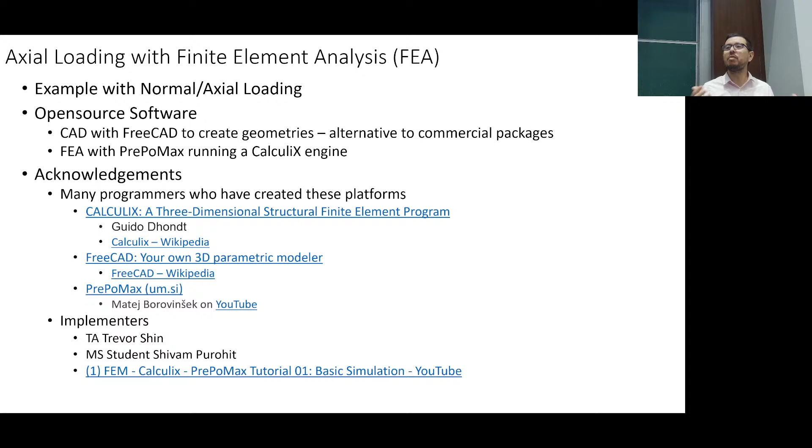You have a variety of packages available for both creating geometries and doing what we could call computer-aided engineering, or finite element, or finite volume, or a whole host of other different types of numerical simulations. When you take multi-physics simulations your junior or senior year, you will use ANSYS, right? So has anyone used ANSYS before? Okay, you were using ANSYS? Great. Has anyone used COMSOL before?

So these are the two big commercial packages available in the realm of multi-physics simulations. If you learn how to use ANSYS, you'll be able to use COMSOL.

I like what Professor Singer has said about these two. I guess we shouldn't have biases, but COMSOL is kind of like the Cadillac, and ANSYS is like a whole bunch of cars that are hard to use or drive. But once you learn ANSYS, if you get an opportunity to use COMSOL, you will. The industry standard has leaned more toward ANSYS, actually. That's feedback we got from our industrial advisory board, so we're going with ANSYS. But academics, we love COMSOL.

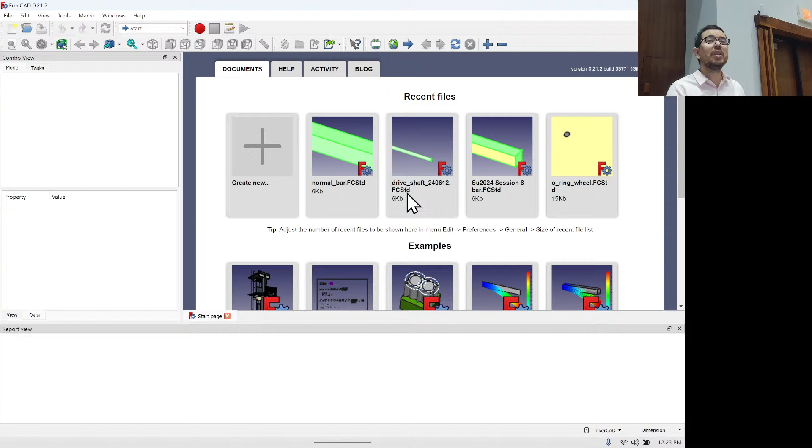Okay, and this will run on a Mac or a PC. At least FreeCAD, I was able to get it to run. We have the Rutgers virtual labs, and I was able to install FreeCAD and run it there. That was fun, that was nice. I had trouble with PrePoMax though. PrePoMax would run on the virtual lab, but it crashed on me. So you might need to find someone else with a PC, or run it in the labs here in EIT or DSV, if you don't have a PC already.

So this will come up, something like this, and we're going to click Create New. One thing that may be a little different, I think it uses maybe this CAD or something. I just have the Tinkercad setting for my mouse, so you might want to have a mouse for this.

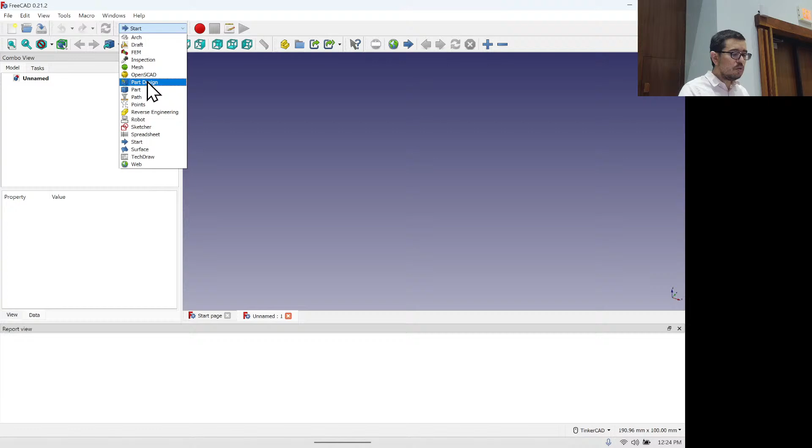We're going to go ahead and get the part coming in. We have these different workbenches, you could call them. You can do Part Design and that would be okay, but for this particular problem, Part is actually probably simpler.

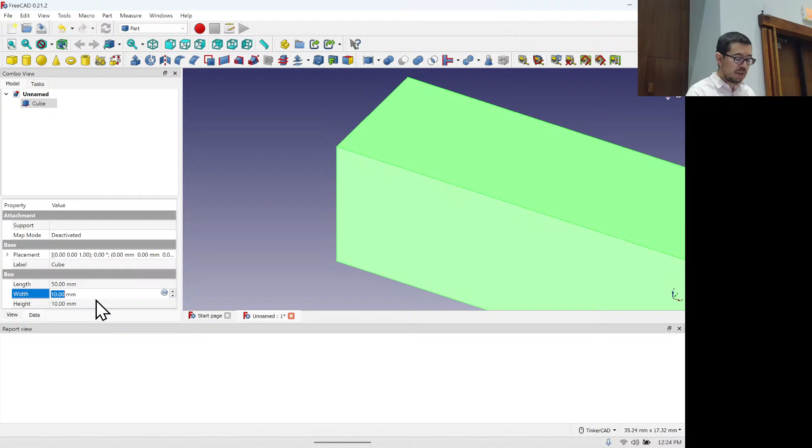We come over here and select a cube, and it brings in a cube. We click on the cube and just give it its dimensions. It's going to be 50 millimeters long, and then 1 centimeter by 1 centimeter, so 10 millimeters by 10 millimeters. So we're done - that's all you have to do in this part, except export.

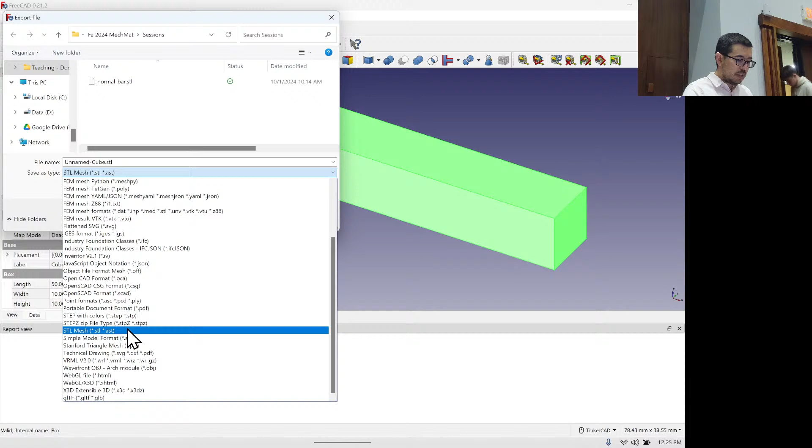So we're going to export this. Yeah, sorry, you had to select that object first. Now we hit export, and we're going to use STL. I think it knows that I like STL - when I installed it this morning, it asked which one I wanted to use. Just use STL, and sure, I'll overwrite what I called normal bar. Yeah, we can replace it. So now we've got this model done.

The next thing we're going to use is something called PrePoMax. So you can just type PrePoMax into Google or DuckDuckGo, and you come here.

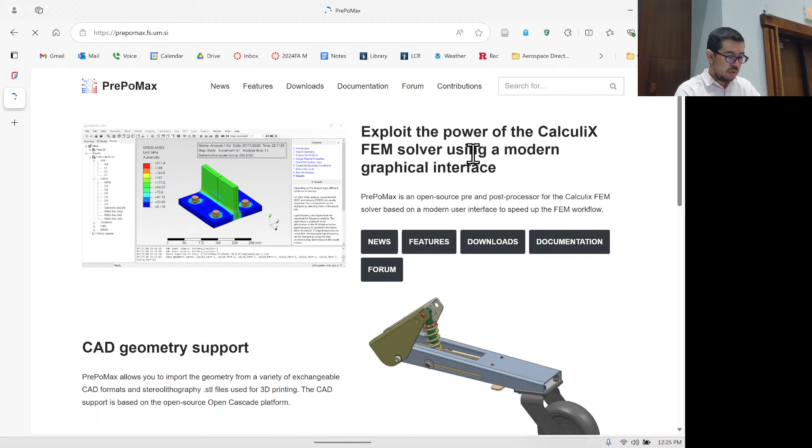We wait, and we can go to downloads. I've used older versions, but this morning I thought, let's live on the edge, so we're trying out their development version. I thought maybe the reason it wasn't working in the Rutgers Virtual Lab was because I was using the development version. So then I went back down to one of the more stable versions, and it also crashed on me. So I don't know exactly what's going on with the virtual lab.

But keep that in mind. So I'll go ahead and try the bleeding edge again and see if I can remember how to do this - the user interface was a little bit different.

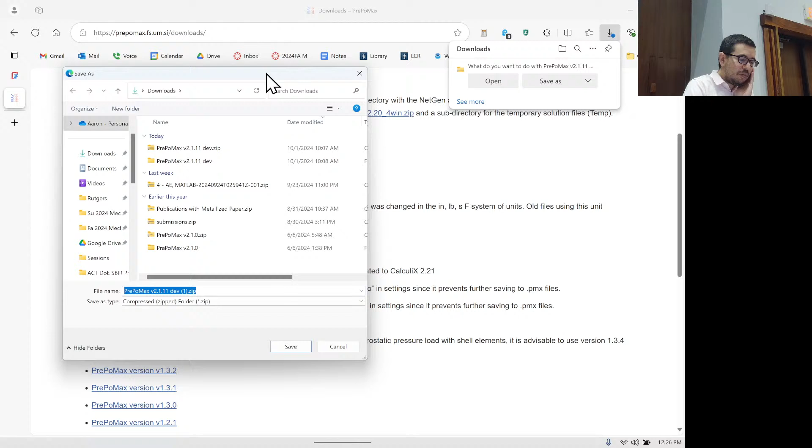What's kind of unique and fun here is that you're going to save, and I understand we live in 2024, so people are not as familiar with file systems - at least that's been my experience working with you younger generation who know how to use things like TikTok and Instagram that I don't know how to use. But back in the day, there was something called DOS, and DOS was all about files and directories. We didn't call them folders, we called them directories.

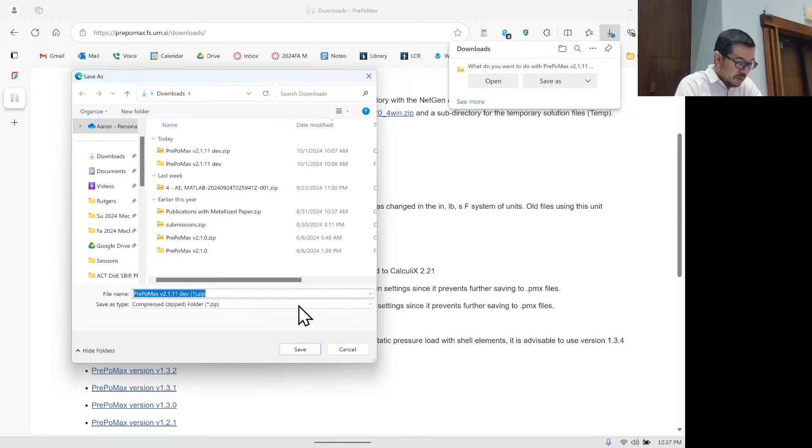Anyway, here I'm just going to download this one to my downloads directory or file folder. It's a little bit large - it's 160 megabytes or so.

Okay, so it's still going. Wow, I must be using a lot of bandwidth in here because this is 2024 and it is boggy. All right.

Well, let's go over and come into the downloads folder. All right, so this is what's downloading, I guess. Okay, now so it's one of these. Okay, I guess this is the one we just downloaded, 1227. So, okay, you right click and then extract all, and we can extract it right there. Okay, and my computer, all right, that should be independent of the internet, but it's of course doing a bunch of processing, and it's not the most powerful machine.

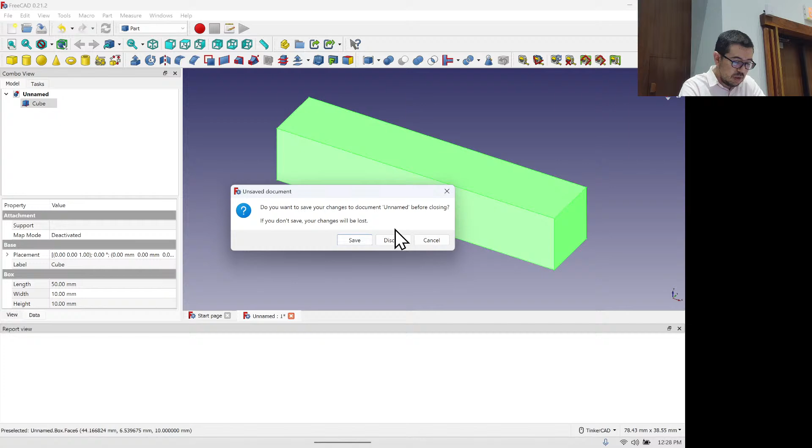Okay, and maybe I'll go ahead and close FreeCAD because I don't need this anymore, so give my computer a little bit of room. I can discard it. I've already saved it as the STL, so I don't need to keep that file.

All right, so now this is a little bit different. This is not your standard... Like the other thing that impressed me recently was I was doing something with the first year students, and they're like, 'Oh, this is an app on a PC.' I'm like, 'App? Who calls this stuff app?' But I guess that's what we call them now. It's a program, all right? It's a piece of software, and we go into it, all right? And this is gonna

upset people, all right? But what you see is we're not installing anything. We're running an executable directly. You see that? We didn't install. We are running the executable. So you just double click on prepomax.exe.

And if this is, okay, I'm just making sure I don't have too many things going. Maybe I do, I probably do. Maybe I didn't double click. Maybe that's my lack of understanding. But we're gonna open this. Okay, I guess I didn't double click. Okay, it's gonna send a scary message. You click more info and we're gonna run anyway. All right.

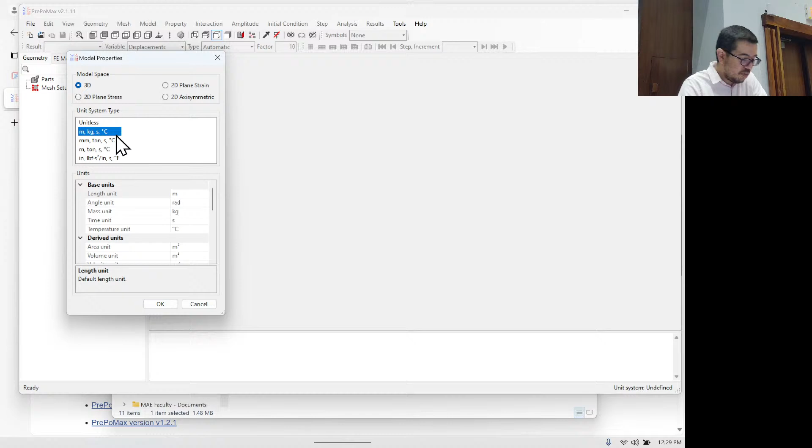Okay, and then it comes up. So once you've got it up, we're going to create a new model. It's going to be a 3D model, and let's just use meters, kilograms, second, and degrees Celsius. Okay, we hit OK. Then we are going to import

our bar, all right, our STL file, and we do that. Now, here's the bar. All right, isn't it beautiful? Does anything strike you as odd about this? Are there any issues? Just look at the image.

Yes. Okay, it's not connected to a wall. Okay, yeah, okay, it's not connected to a wall. That's a good point. All right, it's in space. Anything though, be a little bit observant.

Yes, Mark. The length. What did we say the length was? We said it was 5 centimeters. Look at the scale bar under there. 36 meters. Okay? And in fact, if I bring it down a little bit,

if I can, maybe I can't because I'm not as... Oh, there we go. All right. See, like I can zoom in a little bit, or I can zoom out a little bit. What does it look like its length actually is? 50 meters, right? That's not what we want to solve.

So this is a common problem whenever you deal with STL files and you go from one piece of software to another piece of software, okay? If you do it with SolidWorks, you're going to probably have similar issues. I don't know what the scaling factor is, okay?

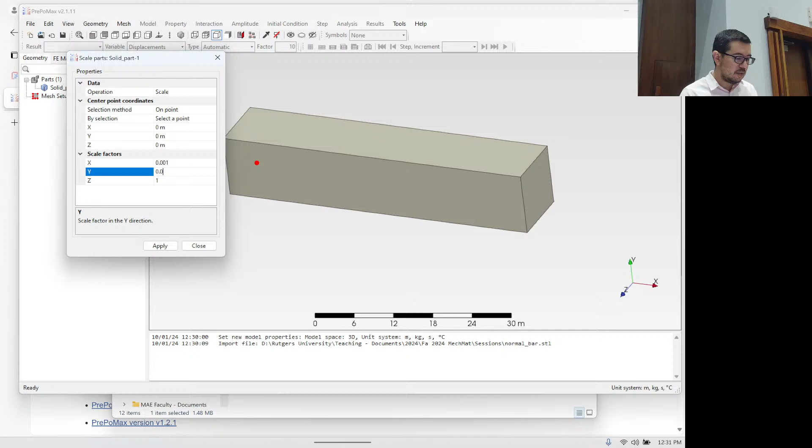So what we do is we come over here to geometry, we go to the part, and we go to transform, and we go to scale. And we're going to scale this by 1/1000 in all 3 dimensions, okay? And we hit apply, and poof, it's gone, all right? Don't hit apply again. It's like, you know, we can just keep shrinking it, all right?

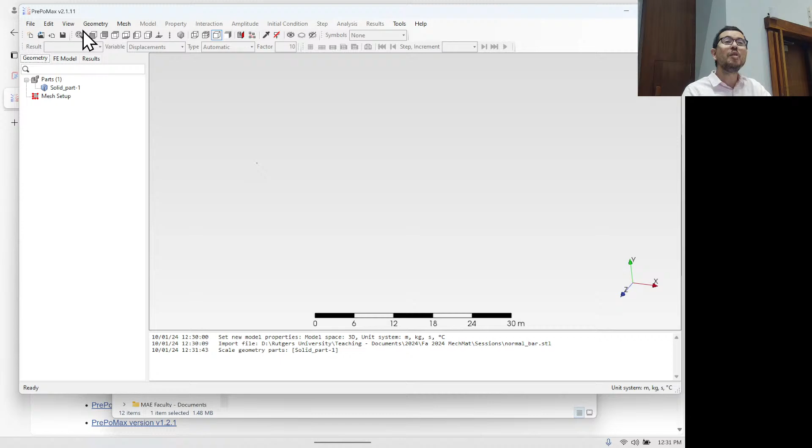Okay, so we close that, and of course, this software, well, maybe not of course, the software is awesome for what it is, but nowhere close to a commercial product. All right, so you click on this thing that says zoom to fit, and voila. All right, now we've got it, and it looks like it's about right.

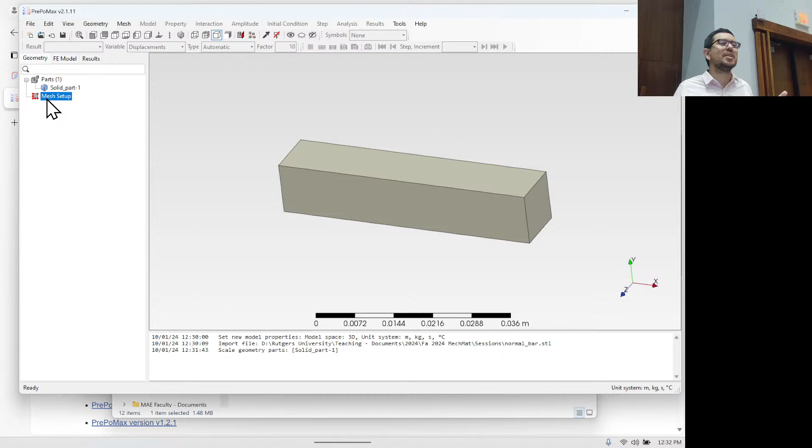Okay, so now we can come over here, and this is an object. It's like the table. What does finite element really mean? It means that this, you know, theoretically has an infinite number of material elements, right, of infinitely small size. Finite element means we are going to discretize this object into a finite number of elements that are interacting with each other, and we're going to see what the result is.

So we come over here, and we're going to use the mesh. We're going to create a mesh, and we're going to click on mesh parameters. We're going to click on part. We're going to click on this, and that's where it crashed. So if it crashes for you, I don't know what to do. All right, find another computer, maybe change your settings.

I couldn't run as an administrator on the Rutgers Virtual Lab, so that might have caused an issue. Try finding a compatibility mode, I don't know what to tell you. That's where it crashed.

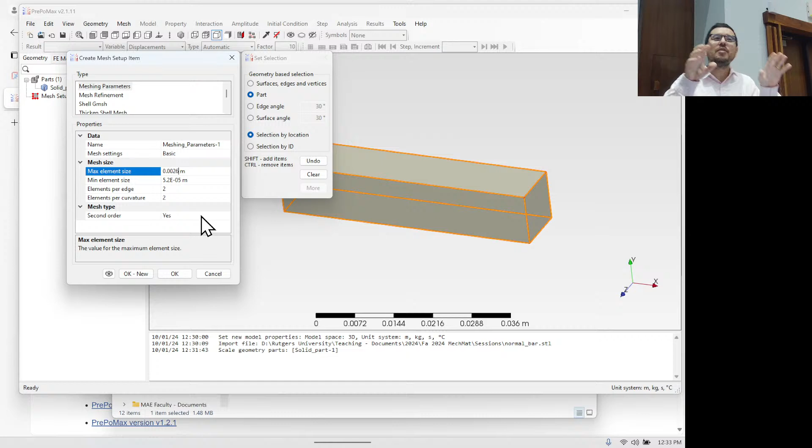Here you get to play with this number a little bit. This is asking what's the minimum element size and what's the maximum element size, and you'll get a feel for this as you do more simulations. You could have a finite element model where it's just like 3 blocks inside, but given our computational power, that's not the most effective number of elements to get the behavior we want. So you can play with this.

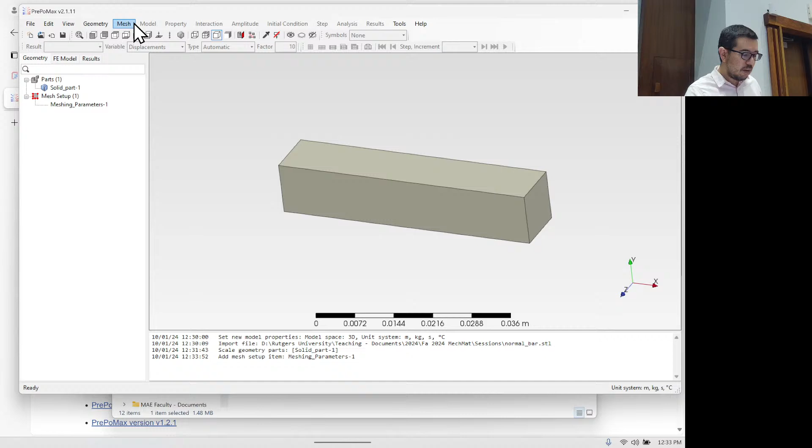If I put it down to 1.5 millimeters for the maximum element size, in this case, I hit OK, and then I do create - whoops, these are just the parameters. Now I go to mesh, and I create the mesh, and it takes a second.

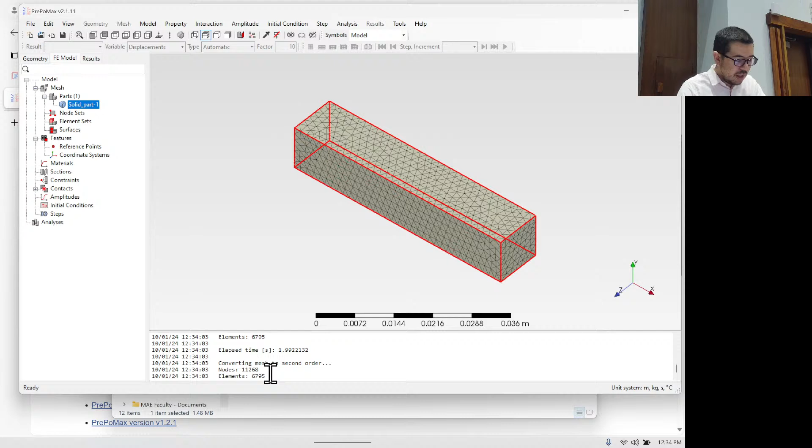That doesn't look bad. You see these - we can only see what's really on the surfaces in this case, but it looks like you've got a lot of elements, right? It tells us there are 6,795 elements and 11,268 nodes, because even though it's not showing all of them, it has discretized the entire volume.

So what do we do now? There's a tree here, and we can attack this in different ways. Maybe I'll go from top to bottom, but it won't necessarily be clear why we're doing things. What we're going to do is create a surface on this side.

This surface is going to be where we apply the axial force. That axial force is going to be distributed over that entire surface, and that's what's going to be pulling the bar axially. So we'll go ahead and create a surface, do selection, and do right like this. Boom, surface 1 created.

We're also going to create a reference point. This reference point is where we're going to apply the load. So we're going to create it, and the easiest thing to do here is actually specify the coordinate.

This was 5 centimeters long, and you see we have a coordinate system x, y, z, so it's in the x direction. So we're going to say 0.05. Okay, and look, it moved it to a corner, right? That's because y is 0 and z is 0. So at least PrePoMax and FreeCAD are communicating about where the origin is. Sometimes when you use other pieces of software, they don't even agree on what the origin is, and that makes things kind of messy.

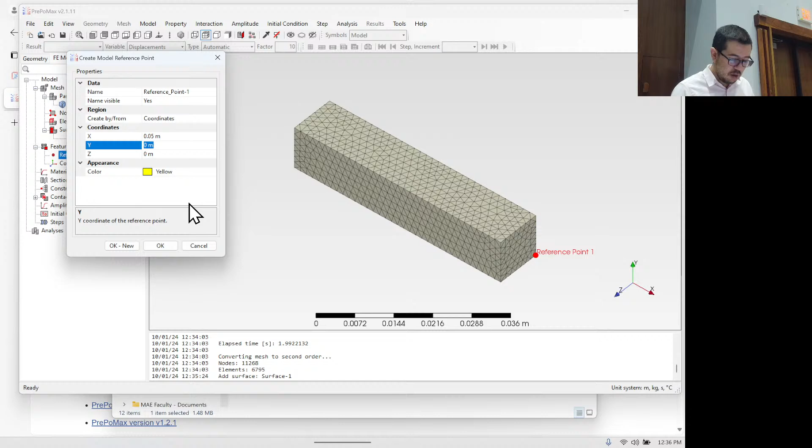So we're going to move it up to the middle, up to here. So we're going to go up 2.5 - oops, yeah, I think that's right. No, oh no, it's not 2.5 millimeters. It's a 1 centimeter by 1 centimeter, so it's 5 millimeters. That will get us to the center. You see that? So that's where the reference point is, and we hit OK. That's where the force will be applied.

Coming down to materials, let's go ahead and create a material that has elastic properties. So we can grab here and drag over - oh, no, maybe not, maybe I better use this. Okay, use that.

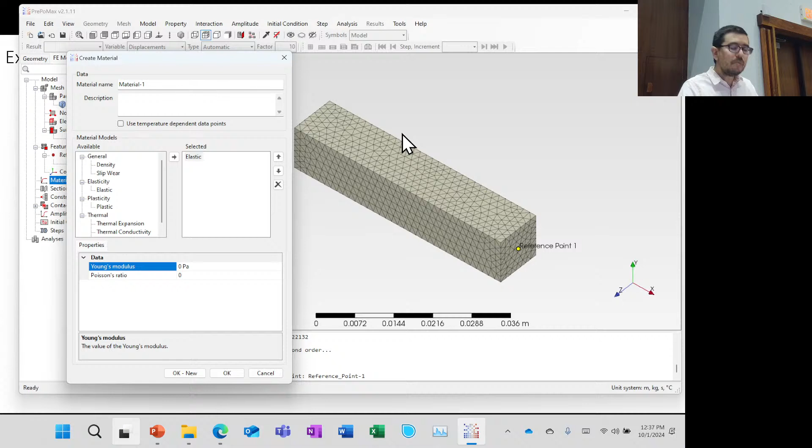And the elastic modulus we were given in this problem - whoops, not there, where are you? Okay, elastic modulus is 200 gigapascals, and the Poisson's ratio is 0.3. So what material is it probably? Steel, probably steel. So we can do 200 GPa, and we can do 0.3, just like that, and that's what we want there.

Sections - we need to create a section. We're going to create a solid section for the entire part. So we just click on it, boom, and it's done.

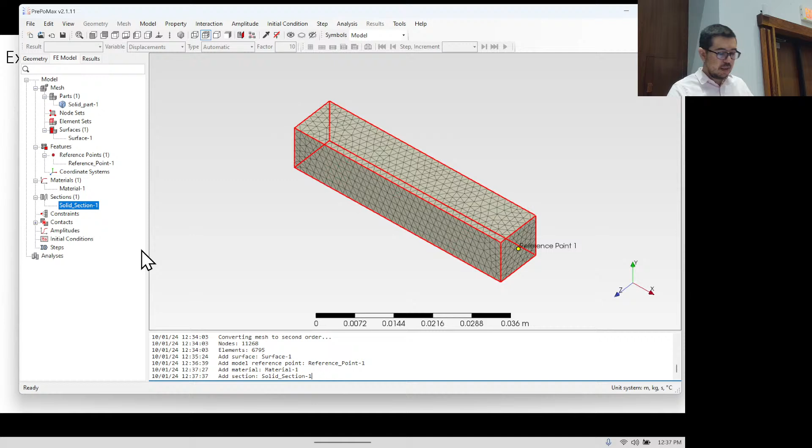So that's a section. In terms of a constraint, we're going to create a rigid body. This is going to link - you see that's reference point 1 to a surface. And what's our surface? Surface 1, that's the only one we created. So they're linked, that means that when I apply the force to that point, it has this surface that's a rigid object. What does rigid mean?

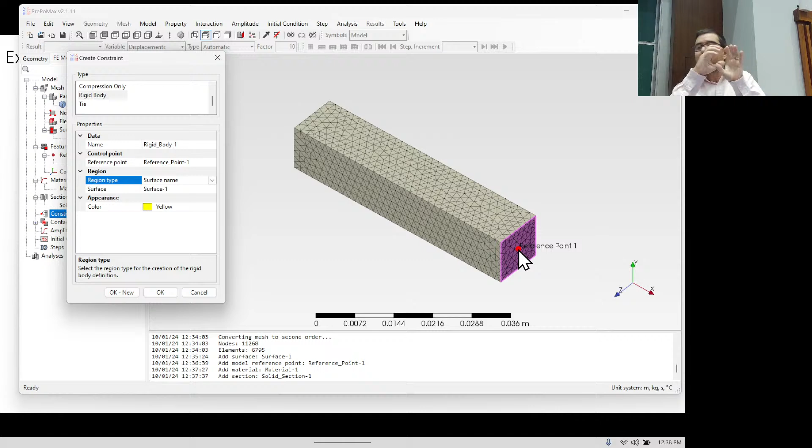It means that it's not going to bend. So when I apply it at that point, it's now distributing that force over that entire rigid surface that does not bend, but is attached to the rest of the body. So that's a nice way to connect them and be able to get a contact force distributing over a larger area. I don't think we need, we're not going to use any contacts here, all right?

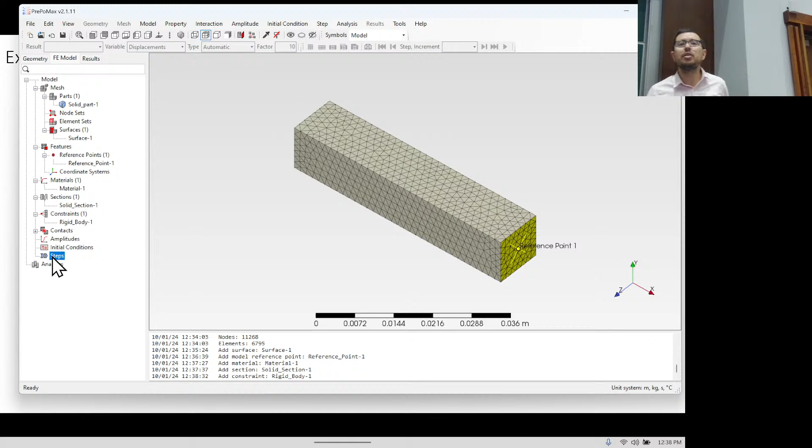And we need to add physics, all right? So in other packages, they'll be like, physics, what kind of physics do you want to use? In this software, it's called steps, so these are the analytical steps. We're going to create, and add a static step. We're just doing statics, right? That's what this class is about. We will actually, if we have time, I'll show you how to do some thermal stuff too. But we hit OK there.

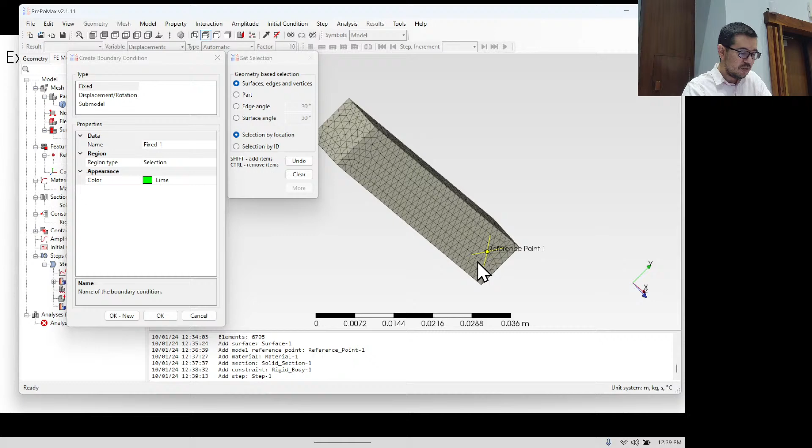Okay, now, finally, who was it? There was no wall. Who said there's no wall? All right, we got to add a wall. So we come over here to boundary conditions, we're going to create a fixed wall, just like that. We hit OK. That doesn't necessarily look like a wall, but it is a wall, okay?

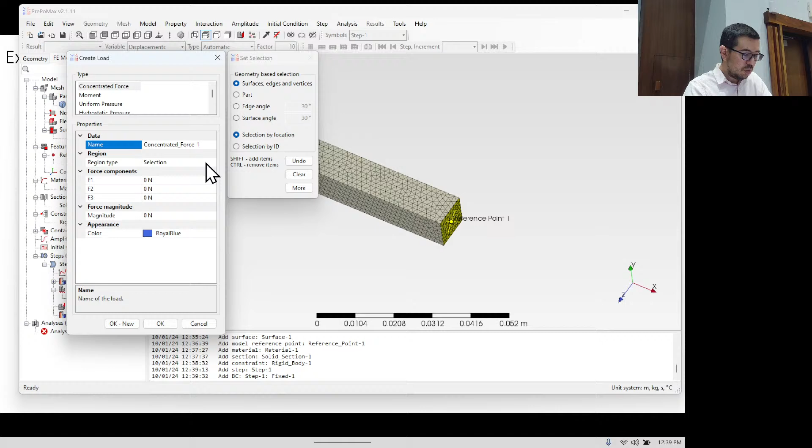And we need to add a normal force. So we come over here to load, and we're going to create a concentrated force, and we're going to use it at the reference point, okay, just like that. And here you're going to see F1, F2, F3. In PrePoMax and other softwares, sometimes instead of saying X, Y, Z all the time, they do 1, 2, 3. So obviously 1 goes with X, 2 goes with Y, 3 goes with Z.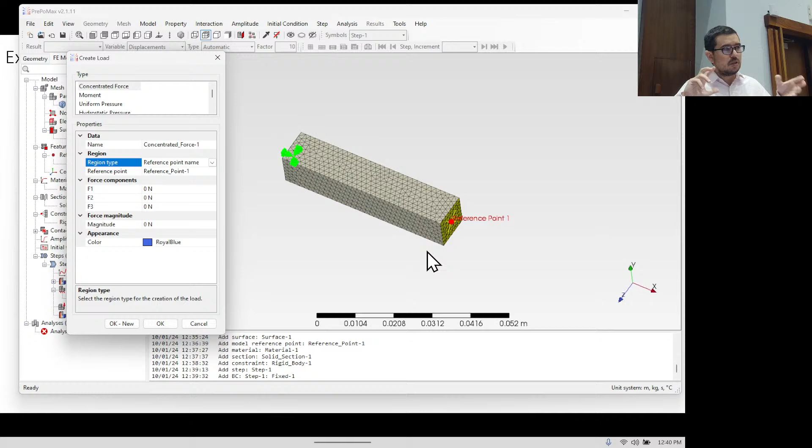At least usually. I've had issues with the coordinate systems in PrePoMax in the past. I hope at least for this problem it's not going to be an issue, or at least for today we shouldn't have any issues. But when we start doing things with shear and shafts and beams, I have had some issues with it. I don't know, we'll see once we get there if those things have been resolved.

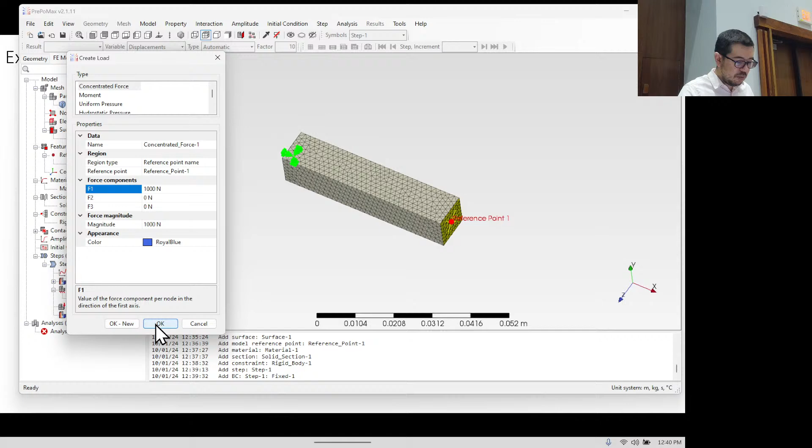Okay, so we're going to apply a force of 1,000 newtons. That was what the problem said, in the x direction. It's got a magnitude here, and we hit OK, and wow, all right, great, it's coming out. 1,000 Newton force right there.

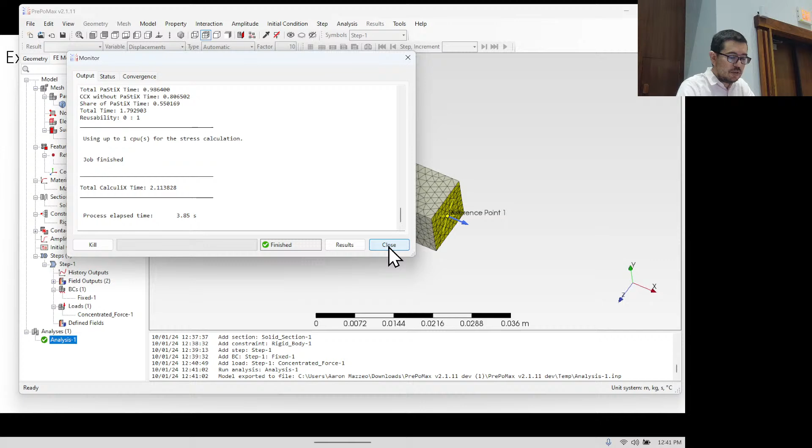Okay, and if I have not made any mistakes, I think we're ready to go. So we're going to go ahead and run the analysis. It takes a little bit of time, but it's actually probably faster than you or I could do that analysis. Well, definitely faster than the finite element. But whether this is more, how do you say it, more efficient than doing the hand calculations, that is debatable. All right, so now, oh, what happened?

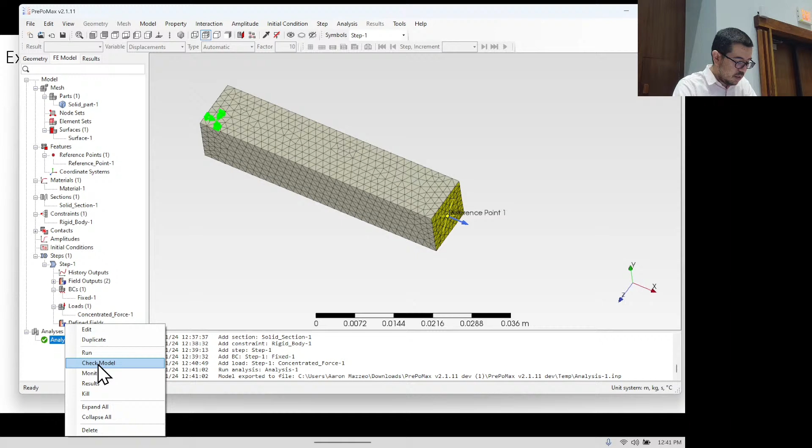Oh, I think I need it. Let me just run it again, or maybe results. Yeah, if I click on results, there it goes. Okay, so here are the results.

All right, so what are we looking at here? What in the world are we looking at? Okay, this tells you over here. So this is where color is nice, it tells you what it's showing in its colors. So this is DISP. What do you think DISP stands for? Displacement, right? It doesn't stand for 4K display or something like that, right? It's your displacement. And it even tells you what the units are, right? That's meters. So this is going to be giving you the displacement in all three directions.

Okay? Now, what if, and it says, because this is all, right? What if I only want displacement in the x direction, right? And that's kind of where we typically are for this class. I can select that, so that would be U1 here. That's displacement 1, and it's in meters. And this node right here is telling us where the maximum is.

Theoretically, this is at the same spot as that, right? Or it's, when we were talking about averages, right? Theoretically, this spot is at the same spot as all of these, right? But this is a numerical solution, okay? And it has a lot of decimal points at the end. So it's going to show us things that are just nonsensical in a sense, right? Like the fact, for example, here that the max is at this node. Is it really any different than, say, here or here or here or here? For our practical purposes, probably not, okay?

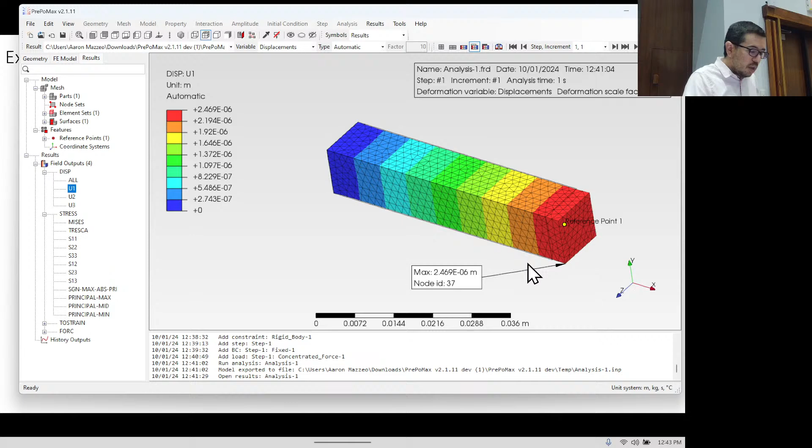The other thing you can do is right-click here and do a query. Let's select right in the middle, because I'm more comfortable trusting that. Now it tells me it's exactly the same number, at least to three decimal places or 4 significant figures. That's the result I've got. I'll hit close, and now that's there.

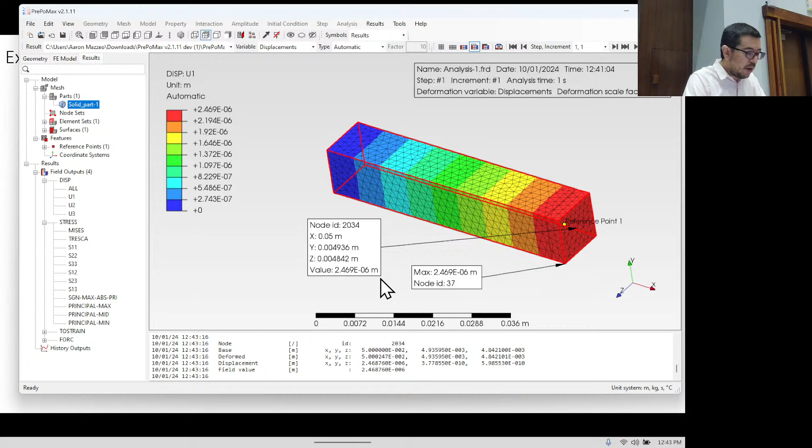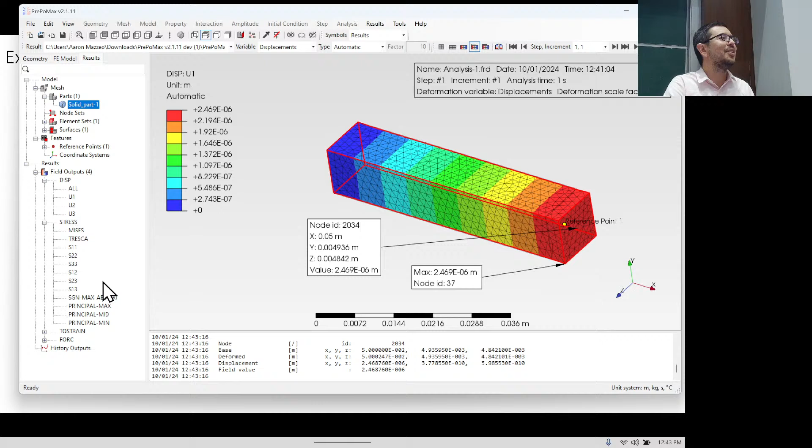What if we want to know stress? Which of these stresses, you see this is called stress. Which of these do you think is of most interest to us? Anyone? Okay, S12. Why do you say S12?

Well, I have no problem clicking on it. Okay, S12, this is interesting. There is a value there. You can see that there are some stresses. S12 means we're interested in the x face in the 2 direction. Think of those as subscripts. S is sigma 1, 2, so that'd be like sigma xy.

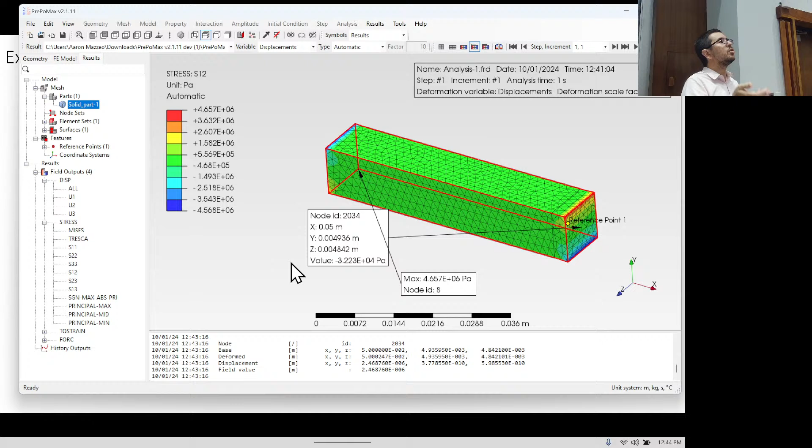We know we don't really write sigma xy, we write tau. So that'd be like a tau, that's a shear stress. In this case, we're not so interested in the shear stress. It does exist, that's fine. If we look at it, it's down at like 10 to the 4th pascals, at least in our area.

And I can put another query over here on the side. But look at this, at this location it's only 13 pascals. So interesting stuff is happening at the edges. Notice that. Why is that happening?

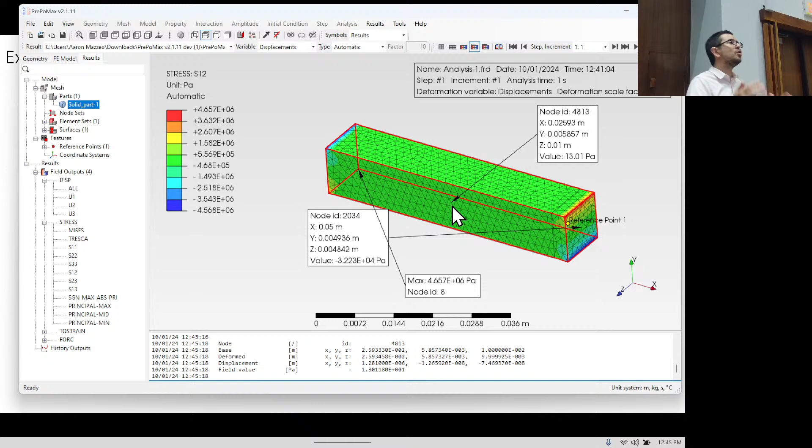Why do you think there's... this is kind of like saying, okay, I thought the stress would be low, the shear stress would be low, because this is not a shear stress problem, this is a normal axially loaded one. But why do you think there are significant shear stresses? It even says 10 to the 6. Why are there shear stresses at these boundaries?

Just think about what shear stress is. Okay, so like you're thinking, alright, if this is sigma 1 2, if it's tau 1 2, it's tau xy. Which direction is the x direction? Well, the x is on, so this would be acting on this face, that's on that face, and then it's acting vertically. That's the direction of the force.

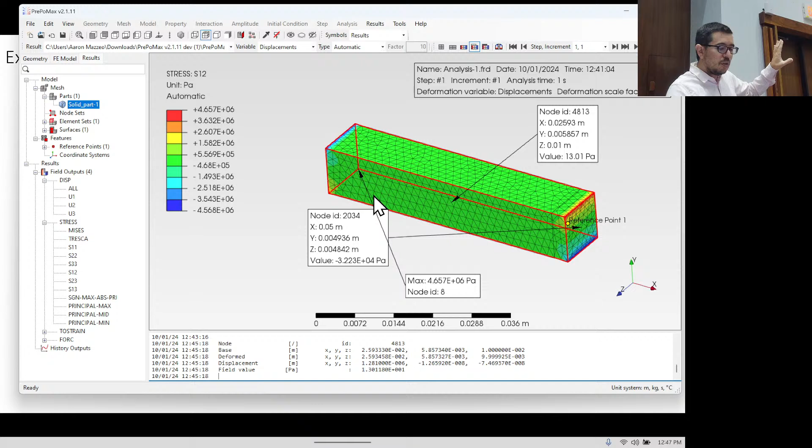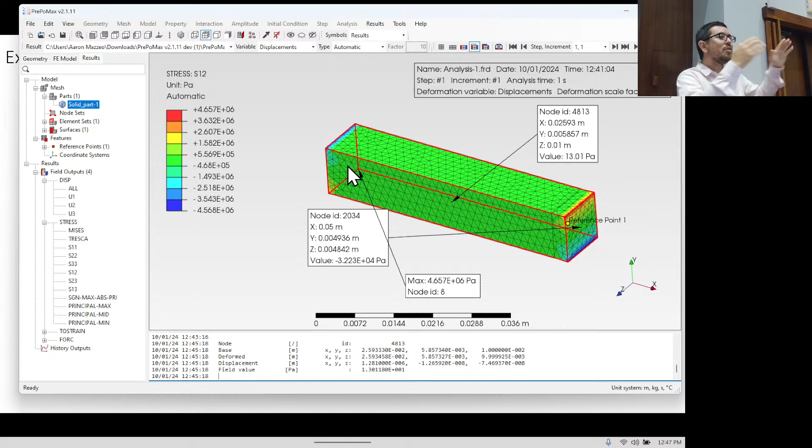Does this material, if I'm just pulling it, what do I know if it's a real material with a Poisson's ratio? We know that material is going to want to contract as I pull this direction, it wants to contract. But I'm telling it, no, you're stuck at these locations. So there are shear stresses involved in essentially maintaining equilibrium that says, oh, you really want to move, but I'm not going to let you. So that's why when you look at these boundary conditions, it's very important that we have an idea of what is happening and what's real and what's not real.

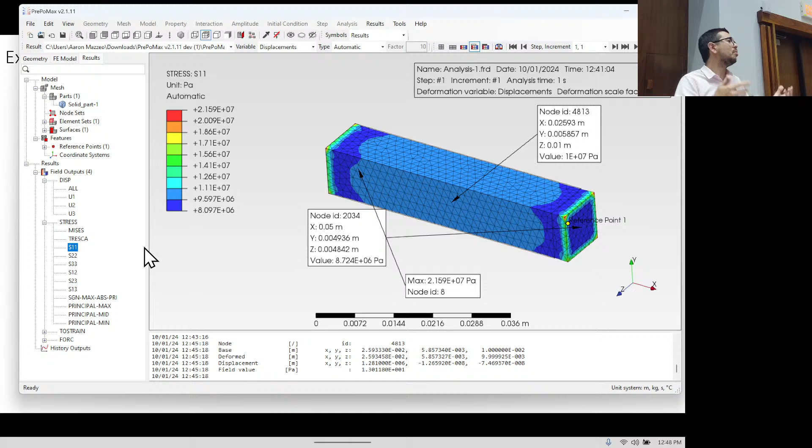So going back, the one that I think at this point people are like, yeah, what I really am interested in is sigma x, because that's the axial stress. So S11 would give me that. Remember we said we don't normally write sigma 1,1, we just write sigma x. So this is the axial stress, but once again we do see that there's some strange stuff happening at these edges where those constraints have been added.

So if I'm interested in really understanding what the normal stress is here, for our intents and purposes in this class, I don't do my analysis on these boundary conditions because they're scary, I don't know exactly what's happening. I go to some place like the middle. You see that? This tells us S11 is, what is that? 1E7 pascals, what is that? 10 megapascals. What was our force? It was 1,000 newtons. What was our cross-sectional area? Well, it was 1 centimeter by 1 centimeter. What's that in meters squared?

Yeah, it's 10 to the negative 4 meters squared. So I've got 10 to the 3 newtons over 10 to the minus 4 meters squared. That gives me 10 to the 7 pascals.

So we're right on, right? See, this is where you want to, when you're doing a project, the first thing you want to do is put your really complicated geometry into the finite element software. And then you have no idea if it's garbage or goodness. What you got to do is do some simple cases where you're like, oh yeah, that's my analytical calculation. I can trust now that at least I've got a process where the stresses that I'm measuring match the stresses that I just calculated by pen and paper, or pencil and paper, or Python and whatever.

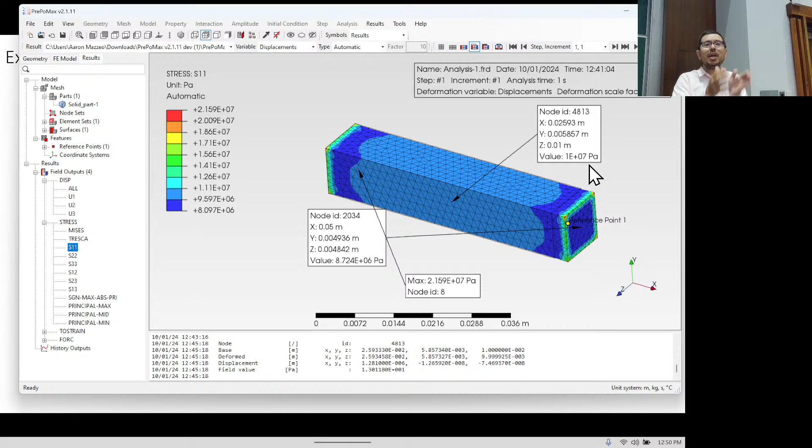Or Google, right? You got to do these, I call them baby steps. If you take multi-physics with me, I'd be like, baby steps, do the baby step first before you jump into the teenager, okay? Because the teenager is super complex, super complex. All right, there's all kinds of stuff going on there. All right, so that is a good baby step.

All right, now what did we say? Remember, we did a hand calc for the strain in the x direction. So look at this, right? This is pretty simple. I have epsilon x, right, is equal to 1 over E times this large equation. I do have a Poisson ratio. Do I have any sigma y and sigma z?

Well, I might next to the boundaries, right? But in the middle region, no, right? It should be like zeros, okay? And then it's just the sigma x over the elastic modulus, which I plugged in, and so we should get 50 microstrain. That's what we should get, okay? In the x direction. So let's do a couple of things.

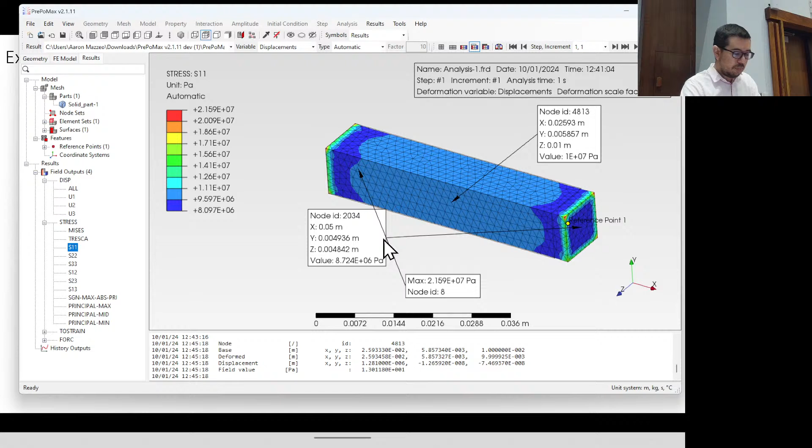First, let's look at S22. S22 is not 0, but it's 13 pascals. That's a whole lot less than 10 to the 7th, right? And again, this is where you want to do your checking. Does this make sense, okay? If I do sigma z, right, again, it's even smaller. It's minus 2 pascals, right? That's good enough for our intents and purposes.

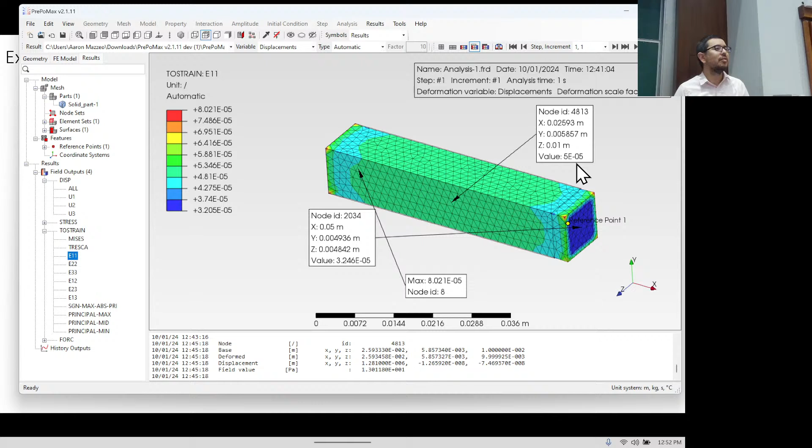Okay, so that's stress. Now let's look at strain. Here's the moment. Epsilon x. 5e to the minus 5. What did we say it was? We said 50 microstrain. We're right on the money, okay?

Now, we also can calculate out what the strain should be. And notice that these values, this value is kind of on the right order of magnitude, right? And this value, even though it's like a max, it's also kind of on the right order of magnitude. But again, I wouldn't trust them. Look, that's like 40% off or 60% off, okay.

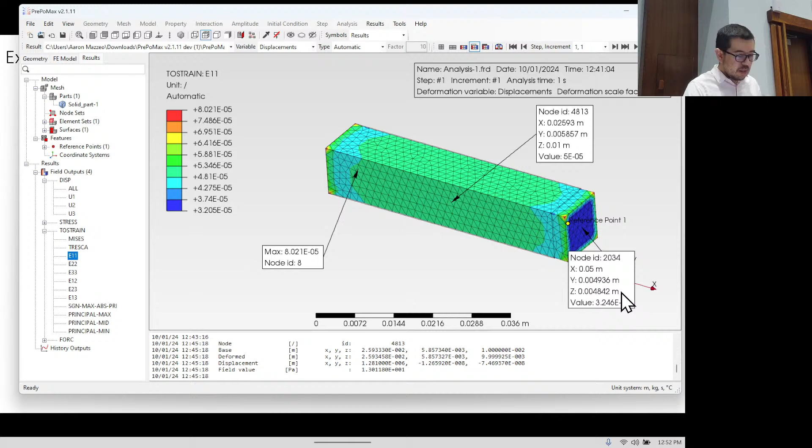So now let's look at the strain in the y. Now look, is there a y stress? No, we said 0, right? But there is a sigma x, right? And there's a Poisson ratio, so there's going to be a non-negligible strain in the y direction. Okay, and that epsilon z is going to equal epsilon y. So if we look at the normal strains in the y and z directions, we should expect to see something. So let's see what we see.

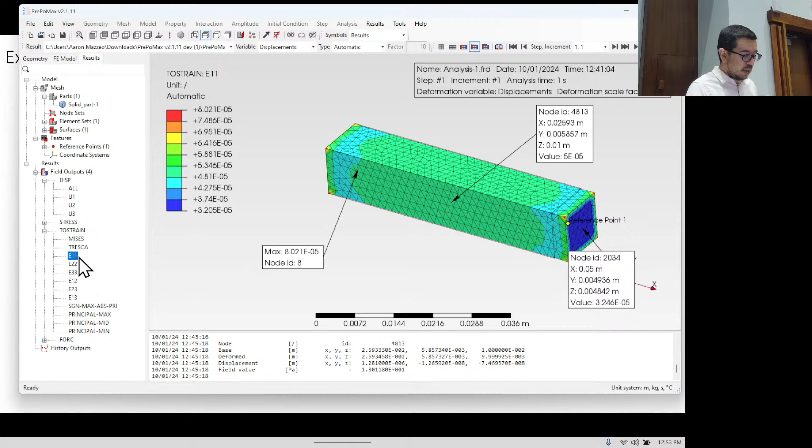Okay, and so let's look at epsilon 2. Look at that, minus 1.5 e to the minus 5, minus 15 microstrain. Okay, look at this, minus 15 microstrain. Again, other stuff is happening in other parts, but at least in this region that's far away from all the craziness at the boundaries, we're getting a very nice result that matches what we had. Okay, any questions on this?

Yes. The elements that we created on this, are they throughout the volume or just on the surface? They are throughout the volume, but we're only looking at stuff on the surface. Are there ways to interrogate the insides? Yes. Is it easy to do in PrePoMax? No. Okay, but yes, often what you'll do is you'll take a cut and you'll be looking inside. For these problems, for most of the problems that we'll be doing in class, we're just looking at what's happening on the outside.

Or what's happening on the outside is enough for us to understand. But absolutely, a good package and a good user will be able to get into the insides of this.

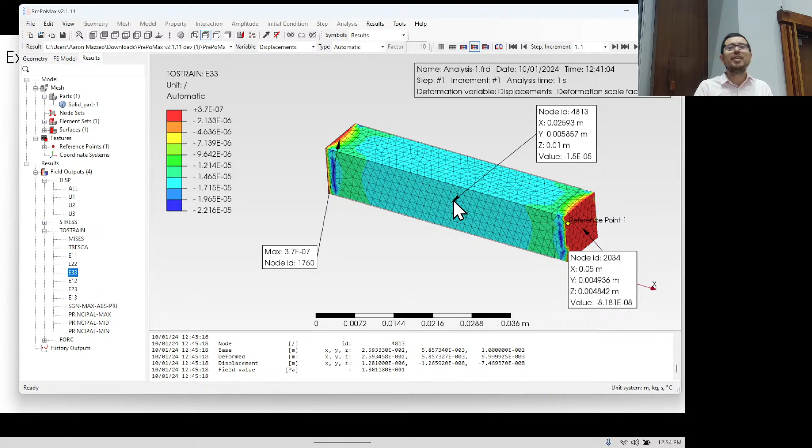Good questions. All right, so this is kind of fun. What do you have for your assignment? You just get to put in a geometry and run some numbers, and you get to put up a screenshot of this. What have we learned so far in Canvas? The numbers change every time. I don't like it either, but that's just how it works. This assignment is notoriously bad for people not putting in the right number for the normal stress or normal strains, getting that part wrong, but having done the simulation already, and then they have to redo the simulation.

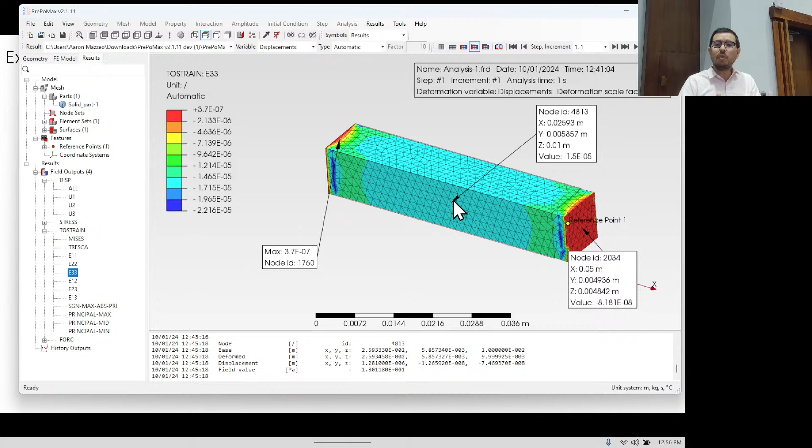There's not a really good way to navigate this. So what I would say is, before you hit submit, make sure that your calculation by hand matches the calculation you have here, because the screen's not going to change. You can even close Canvas, that problem that's for you at that given moment is fine. But the calculation, the number that they want, that I'm asking you for, is from the hand calcs. The screenshot needs to show the same result as the hand calcs. Does that make sense?

So save yourself a little trouble. Don't be trigger happy, right? Go ahead and take some time, make sure the calculations are right. Follow exactly what we did here, and you should be fine. And there's also a tutorial that Siobhan put up, I guess, a year ago or so.

We'll leave this open because there's something else I hope that we have time to do in a little bit.

You can now put on your resume, after the semester, that you have some experience doing finite element analysis after you do the exercises in this class. Because it's not that complicated to do in this respect. To understand the theory, to really get down and make sure that you're replicating complex phenomenon, that's hard, that's really hard, and that's ongoing. People are doing their PhDs on this type of stuff, especially in the area of fluid structure interactions. If you're a mechanical engineer, like turbulence and fluids, it's really rough.

Okay, so this will be one of your questions. Again, it's asking what's the axial strain. So make sure you get an axial strain that matches what you have in your simulation before you submit these things, because you're going to be frustrated if this says it's wrong. And you'll be frustrated if your image doesn't match it too.

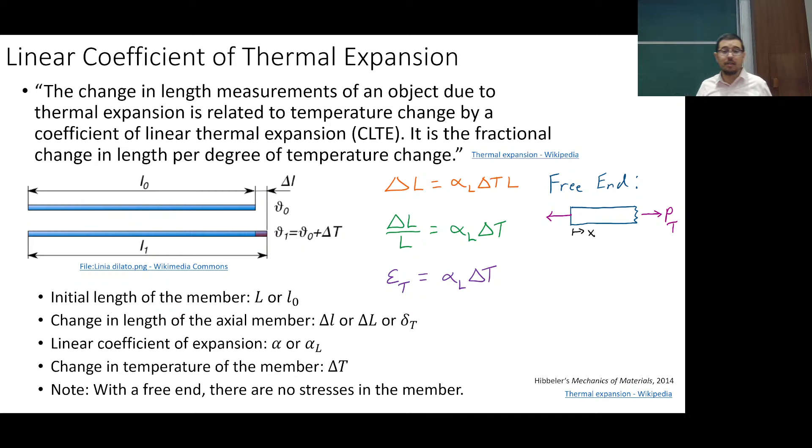This is an interesting situation. With thermal expansion, you can have strain when you heat something up, but there's 0 stress in it. You think we walk around all the time and things are expanding and contracting, and if they're not constrained between objects, there's not going to be any stress in them. So this is just saying that the internal force with a free end bar is going to be 0, and the internal stress with a free end bar under thermal expansion is also going to be 0.

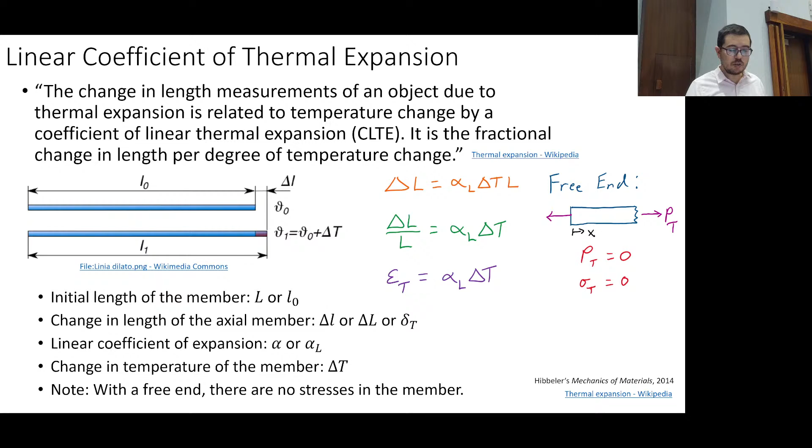Now, there is also something called a volumetric coefficient of thermal expansion. I don't think I've ever said this is the volumetric one, maybe I have, but I'm not going to. I commit to not give you a volumetric coefficient of thermal expansion. But if I were to, it's not that complicated.

Remember, we introduced dilatation, or the volumetric strain, and it was epsilon x plus epsilon y plus epsilon z, which is equal to 3 times this. So if you've got volumetric strain, you see there's a 3 times this mess. So what we have is that the volumetric coefficient of thermal expansion is equal to 3 times the linear coefficient of thermal expansion. And so this table isn't that exciting, because a lot of these values are just a factor of 3 between each other.

What are some things that you noticed here? Just look at the data. You don't have to be a neural network, but use your brain. What do you notice here about some of these materials and their coefficients of thermal expansion?

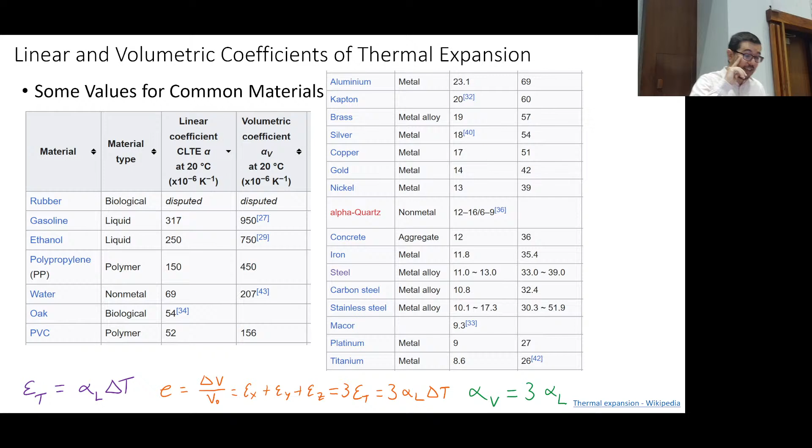Yes, look, those polymers, they're rocking it. Okay, or the liquids are rocking it. Right, these petroleum-based, even water, all of these have a larger thermal coefficient of expansion than the metals.

What does this mean though in terms of importance? Well, if you have an application where you want, let's say you're designing an atomic force microscope, or you're doing something at the nanoscale, if dimensional stability is important to you, polymers are a pain. It doesn't mean that's a game breaker, but it's going to be trickier if you're heating and cooling than some of the metals.

And some of the ceramics are even better, in terms of having low coefficients of thermal expansion. So that's another thing.

Interesting question. Less heat. So metals require more temperature, right? We didn't talk about heat. Why is heat a loaded question here for this class? Well, if you've done some thermodynamics, now you know what heat capacity is, and specific heat capacity, right? And what is that?

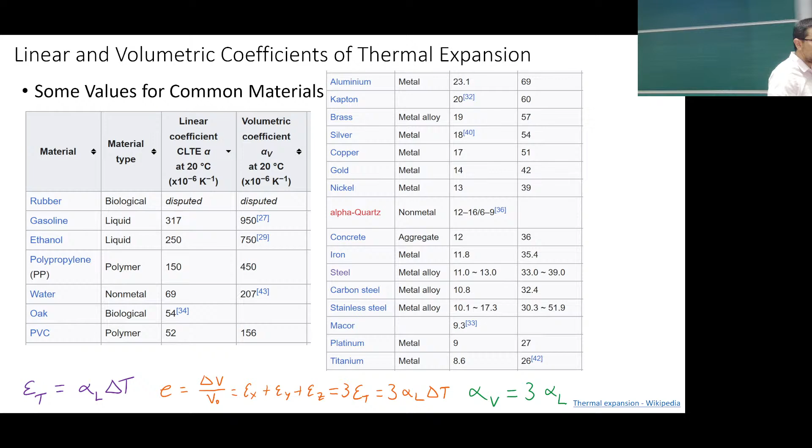All right, and then there are other effects of temperature on these materials. Besides just their change in shape, you have change in strength. They can also become brittle, right? And we talked about the O-rings and the Challenger a couple days ago, right? We did? That was here, right? I forget where I've been and what I've said.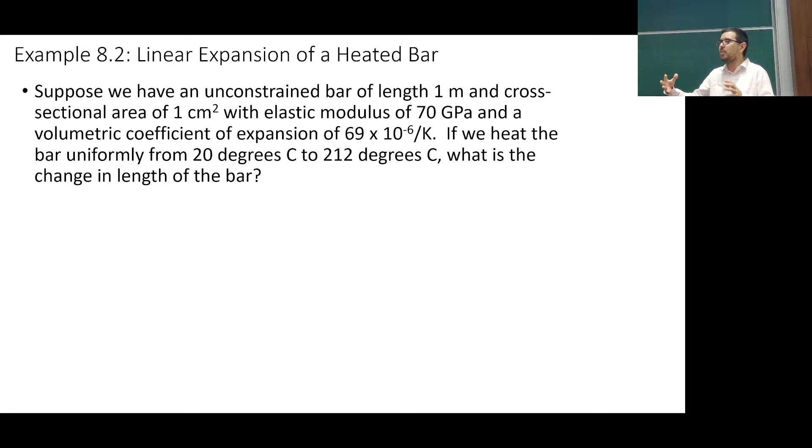But in that case, the O-rings on the solid rocket boosters of the Challenger space shuttle got to a low temperature, and not only would they have contracted a little bit, but they became stiffer as they got colder. And so that caused problems in terms of being able to form a seal, because it didn't squish as nicely into protecting the gap as much as a softer version would have at a higher temperature.

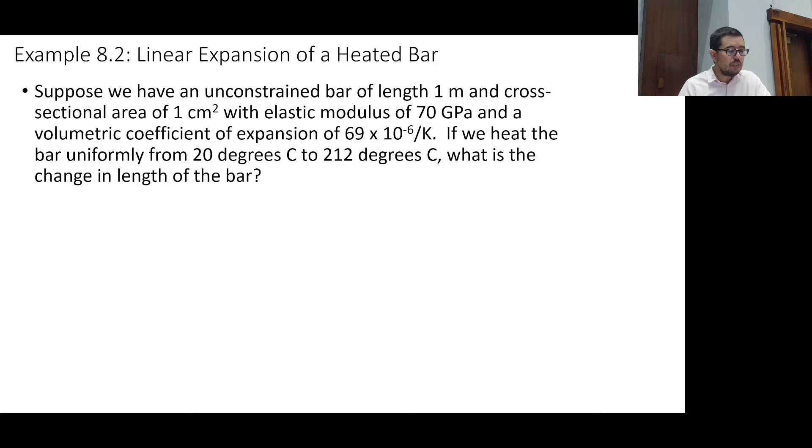Okay, so here's an example. We have an unconstrained bar, length 1 meter, and a cross-sectional area of 1 centimeter squared with elastic modulus of 70 gigapascals. If we heat the bar uniformly from 20 degrees Celsius to 212 degrees Celsius, what is the change in length of the bar? So we might break this problem into the 3 pillars: equilibrium, geometry, and constitutive equations.

So for equilibrium, this is a free floating bar, unconstrained bar. So equilibrium is not so interesting here, okay? It's just 0, right? 0 force, 0 stress.

Geometry can change, right? And if it's free floating, you could argue that one side goes delta over 2, the other side goes delta over 2, whatever, right? But we know that we're going to have some expansion.

What is the prime constitutive equation that we want to use? Well, not that one, but this one would be, the other one's important too, right? Relating the volumetric coefficient of thermal expansion to the linear coefficient of thermal expansion. And we know, I guess you could have written out that the delta is equal delta T times the coefficient of thermal expansion times the length, right? But this is our more technical version that we know of because we've been working with strain a little bit.

And the change in temperature is important. So, you could write it in terms of Celsius, you can write it in terms of K. Either way is fine.

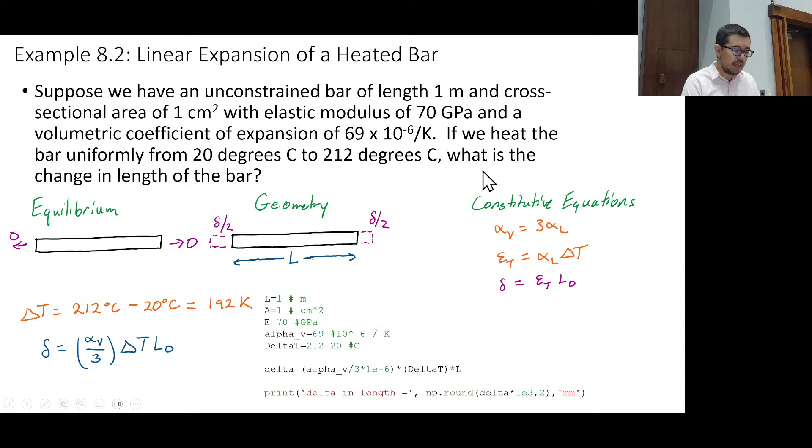All right, so we have now the ability to calculate the delta, and we can put that into some code if we like, but it's really just, take this number, divide by 3, times the change in temperature, times L naught, and that's the change in length. Not insignificant, really. 4 millimeters, I'd be able to see that.

But putting in a meter-long bar into my pot at home, I'm not gonna. That's probably hard to get. Because I gotta get a lot of temperature, right? That's over 212 degrees Celsius, right? I don't know why I picked 212 degrees Celsius because 212 degrees Fahrenheit is 100 degrees Celsius, and that's boiling. But anyway, 212 degrees Celsius is very hot.

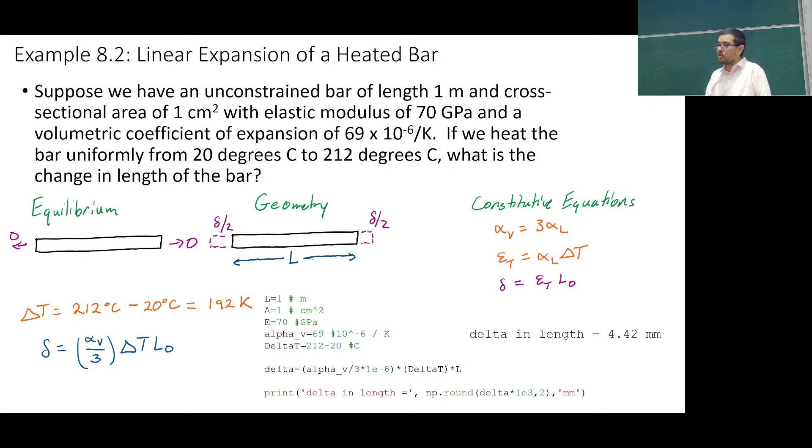Questions? Yes? That's what I'm saying is that they're interchangeable here, right? Because we're interested in deltas for the temperatures, changes in temperature. All right, you got to start from somewhere and go to somewhere else. Okay.

How we are running, oh, I'm so behind. Okay. This is a hard problem. It may not look like a hard problem, but it is. And you should be comfortable with these types of problems, and the assignment will help you get comfortable with them.

They're painful. All right. There are two ways to do this. I'm going to show you the first way, which uses that idea of superposition, where you expand something and then we apply a force to constrain it. And I thought that would be the easier way to approach this problem.

No. I think the geometric compatibility, the second thing I'm going to show you, is an easier approach. At least fewer lines of writing. Okay, but this is kind of a classic problem, and it helps us understand this push of war, this tug of war between materials that are constrained between two walls.

So we have a bar with an elastic modulus, some length, and some cross-sectional area. And what we're saying here is that the cross-sectional areas, those are going to be the same. Okay? They don't have to be, but they are. And but everything else is different.

Right? We have alpha 1 and alpha 2. We have elastic modulus 1, elastic modulus 2. We have a length 1 and a length 2. Right? And now the question is, what are the axial strains in both sections?

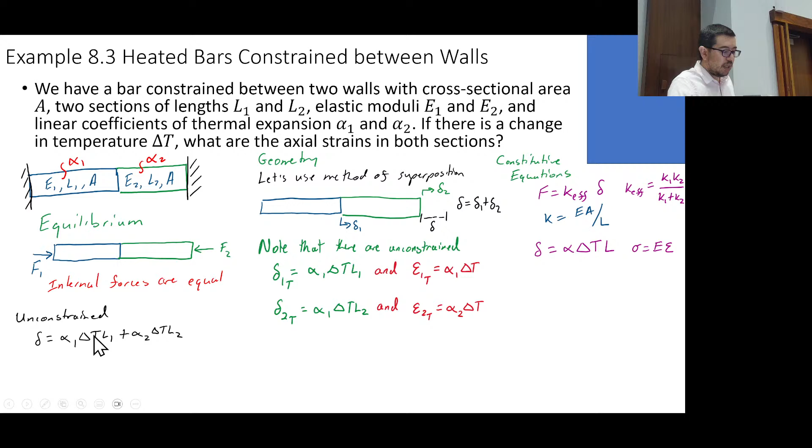Now, what is the unconstrained delta on this end? Well, it's just going to be the summation of these two equations right here, thermally unconstrained, meaning I've removed one of the walls.

So what does this mean? This means that the force that I apply to the system has to overcome this amount of displacement. So we're going to apply F1 or F2, they're the same, and we're going to constrain it to constrain this displacement.

Okay, and so what is that force going to be equal to? Well, I figured out what my K effective was over here, and I know my K effective times my delta is equal to force. So the force that has to be applied by these walls has to be equal to the unconstrained thermal expansion times the K effective.

Does that make sense? So we have F1 and F2 are equal to each other, and this is how you calculate them.

So now, okay, I can figure out what the delta due to force is in each of these, right? Because I've got this force, this could be F1 or F2, whatever it is, F1, or it's equal to F. If I divide by the K1 for this one, then I know what the delta is due to this force.

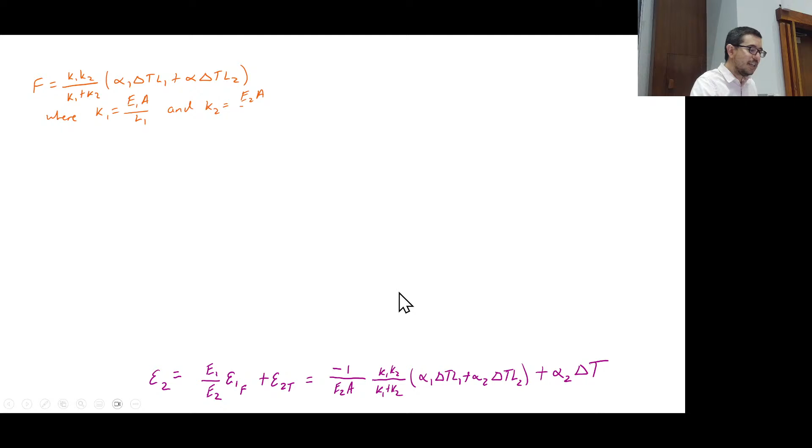Okay, so then we go on. Oops, there's the answer, I guess I didn't cover it. All right, remember this: this is just the delta overall, this is the K effective, and this is the force.

Now we're saying that K1 is equal to E1A over L1, and K2 is equal to E2A over L2. We can figure out what the mechanical stress is. Sometimes people will say mechanical, since it's not thermal, it's mechanical, but this is all mechanics, so that may not be the best way to put things. We can figure out what the mechanical strain is by doing F over EA.

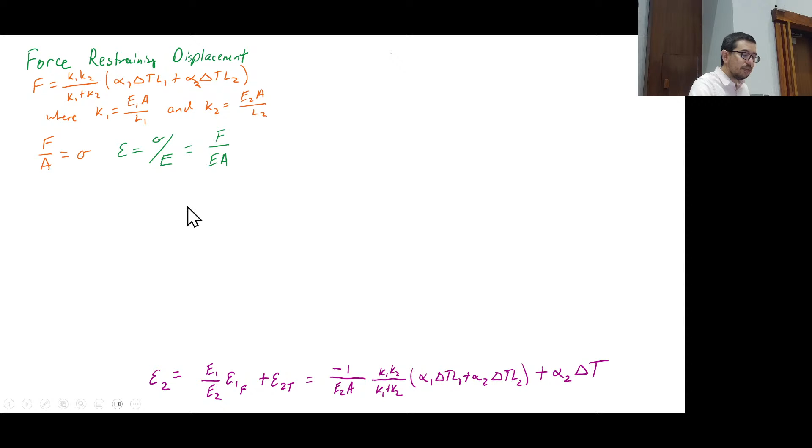The thermal expansion, we've already talked about that a little bit. This is going to be the mechanical strain in both of these cases. And then we put all this together: the mechanical strain and the thermal strain, which we calculated out here. We've calculated out our thermal strains here.

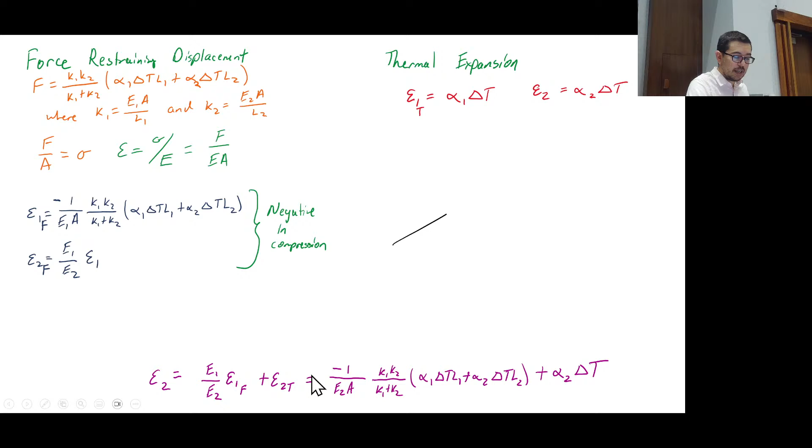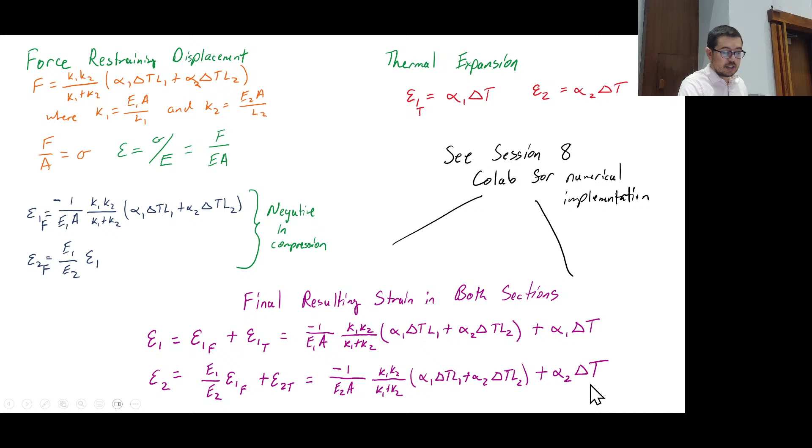We put them all together. That's just the alpha, see, it's not that complicated. The thermal strain actually is pretty easy: epsilon 1 thermal is just alpha 1 delta T. But this mechanical strain was a pain, and we had to calculate it out. Same thing here, this mechanical strain is the complicated one.

That is one way, that's the answer. That's kind of nasty, but that's the answer. How would you do this just using geometric compatibility? Well, I'll try to quickly go through this in 2 minutes.

We break into 3 categories like this, and we say from geometric compatibility, the deformation, so sometimes we say delta B relative to A, that's the deformation in this region, and delta C relative to B, the deformation in this region, that has to be equal to the deformation from C to A. But the walls are not moving, so that's equal to 0. So now we know the deformation of this left one plus the deformation of this one is equal to 0.

And we know what the K's are. We have constitutive relationships again that we can use. And we can calculate the total strains as just being delta BA over L1, and delta CB over L2. These are just definitions of strains.

Now, what is delta BA? This is interesting. This is going to be what it would have been in its unconstrained state minus F over K1. I didn't separate them, it's kind of like doing the same thing, but they've been compressed or combined here in equilibrium, and it's actually in geometric compatibility, sorry. And that's the same thing for delta C relative to B.

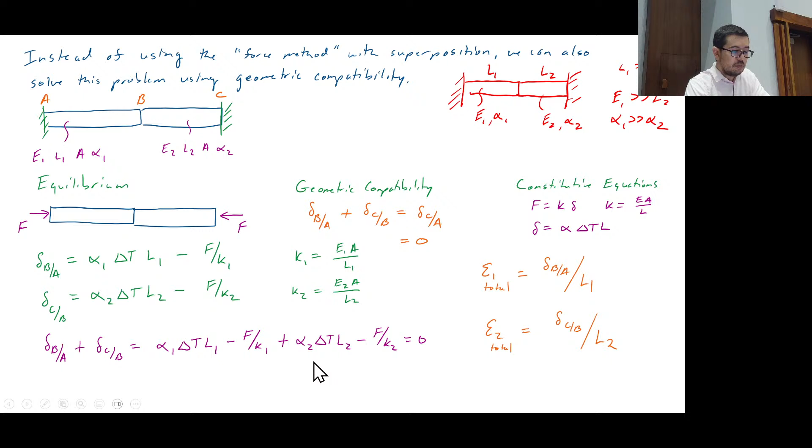Then I add these together, and they have to be equal to 0. And now I have a force, you see that's the same force. I know everything else: I know K1, I know K2, I know alpha 1, I know delta T. What I do not know is the force. So I can solve for the force, then I can put it back in here, and put that over this, and that gives us the strains. Any questions on that?

So that is arguably a shorter way to do the problem. Either one would be fine. It's just very important that we keep track of how the strains are adding to each other, what's mechanical, and what's thermal.